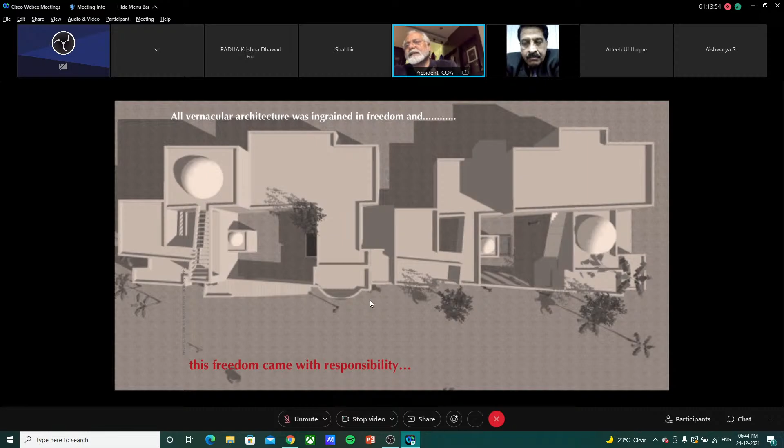When we talk of vernacular architecture, we think of mud buildings, huts, thatch roofs, tiled roofs, and so on, but not necessarily. Vernacular architecture has a larger canvas to look into and get inspired from. Traditionally, creativity was always linked with common sense, and all vernacular architecture relied on logic and purpose. We have lost logic and purpose in architecture today.

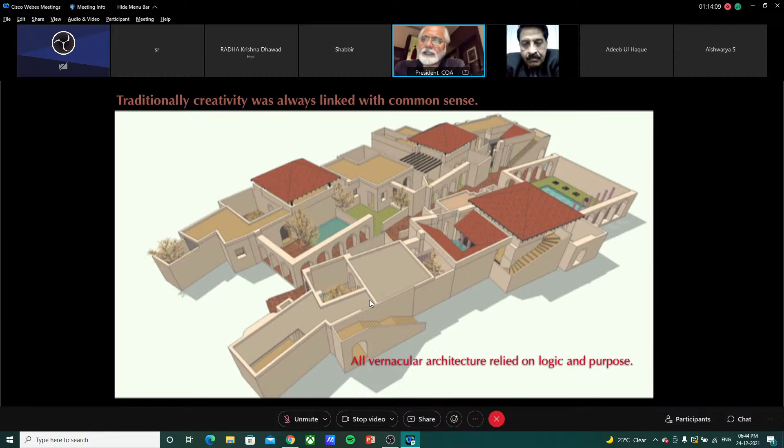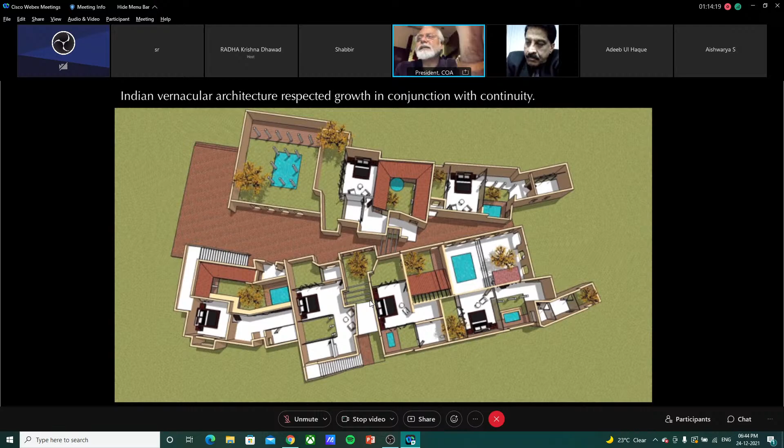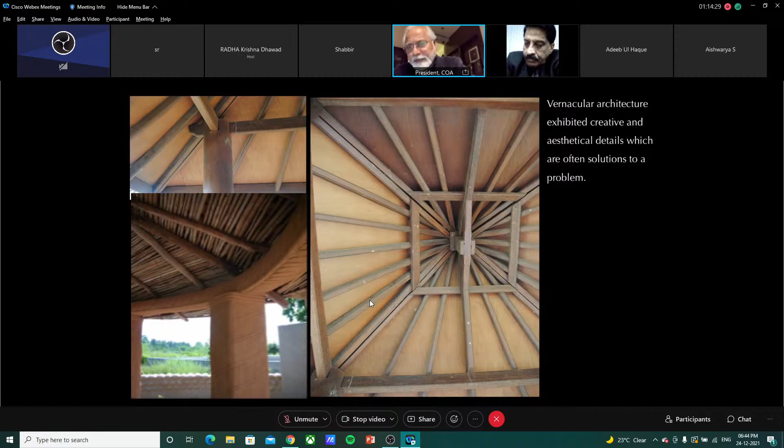Indian vernacular architecture respected growth in conjunction with continuity. That was very important—the chain of evolution I was talking of, growth in conjunction with continuity. Vernacular architecture exhibited creative and aesthetic details which are often solutions to a problem. Today we are creating problems and then giving solutions. It's the other way around these days in architecture.

Our architecture at Smita and Habeeb Khan Architects is a response to this, and a realization of the importance and appropriateness of the traditions of architecture that have gone by. Architects need to pick up the threads that modernity severed—the need to reinvent a new and more responsive architecture, which will be a continuum of the vernacular and a response to climate, context, tradition, and culture.

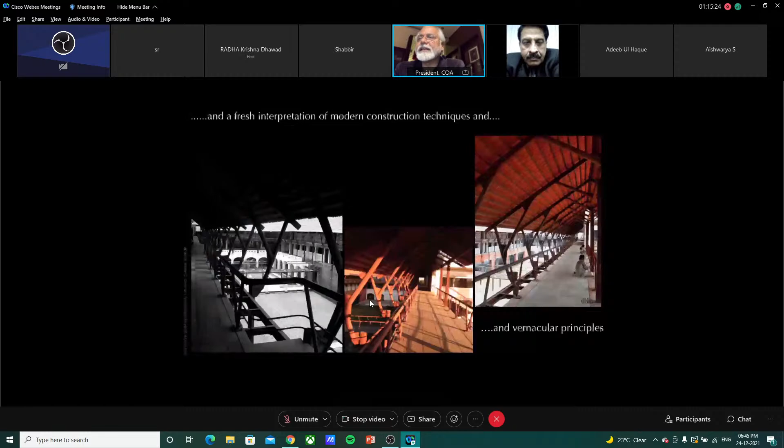We are reinventing the wheel time and again—our lost construction techniques, the importance of daylight, the ramifications of heat, and the appropriateness of built forms—resulting in a new architectural vocabulary, a language having its roots in layers of traditional wisdom, and a fresh interpretation of modern construction techniques and vernacular principles and forms, forming a link between the past and the present.

And this we call contemporary vernacular, wherein we learn heavily from the principles and wisdom of vernacular architecture and try to incorporate it into contemporary architecture.

I do not want my building, when excavated 2000 years down the line, to be mistaken for one built in 1011 or 1016. I want my building to look contemporary while it stands on a solid ground of vernacular wisdom. That is what is meant by contemporary vernacular.

This project is PIADS, Priyadarshini Institute of Architecture and Design Studies, my school of architecture. In central India, wooden posts are used for making huts and houses in villages. When the wooden post goes into the mud wall, it decays fast and gets eaten by termites. So they devised a technique where the walls stopped earlier and the wooden post went into the ground. The same thing happens with steel columns, so we used the same principle where the column stands independent of the wall.

Now, what in a nutshell is contemporary vernacular? It's like going back to roots, building sensibly, building optimally, building intelligently, and building correctly within the framework of context, climate, tradition, geology, geography, and economy. That, to me, is contemporary vernacular.

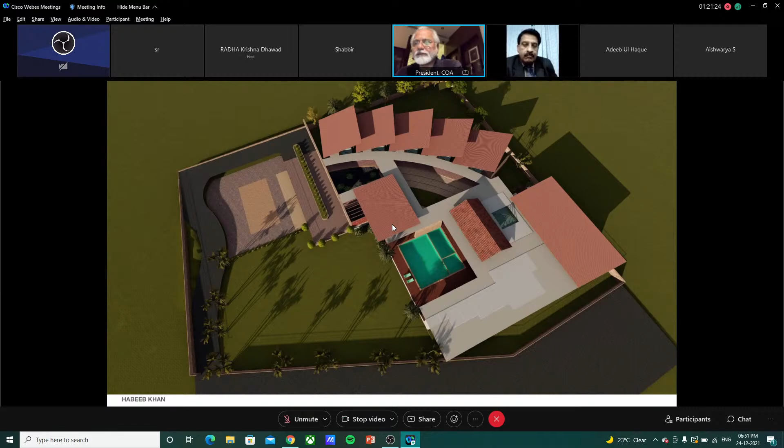This is a farmhouse which we're doing here in Nagpur, and it is a zero carbon footprint building. It sustains itself. It has solar roofs, local tiled roof, and local stone used. The entire water is being recycled within the complex, and the entire electricity is being produced within the complex itself. This is how it is.

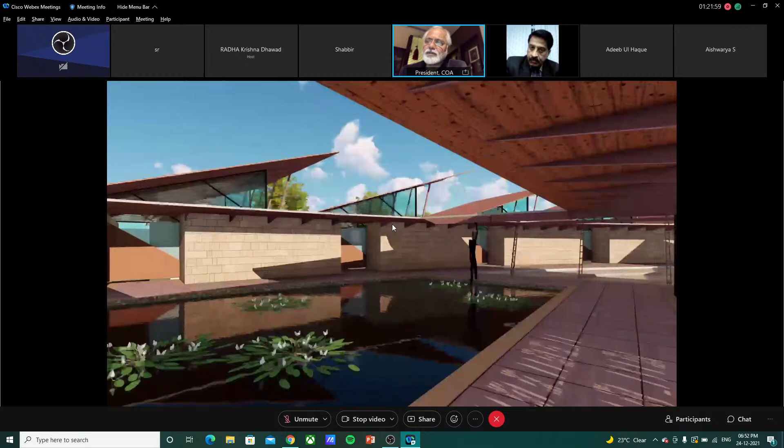I'm not explaining the project further. This is the entrance. You have a lot of water bodies to mitigate the dry heat in Nagpur, which reaches about 50 degrees in summers. We have large overhangs, large corridors. These are the rooms which are floating, very light material. The entire construction is in steel, and this is how it looks.

Swimming pool and the living room behind it, deck on the right hand side, various angles. Everything is steel and glass, heavily shaded from direct sun. Load-bearing walls, there's no concrete here — it's all stone, which is load-bearing, and the roof which is there.

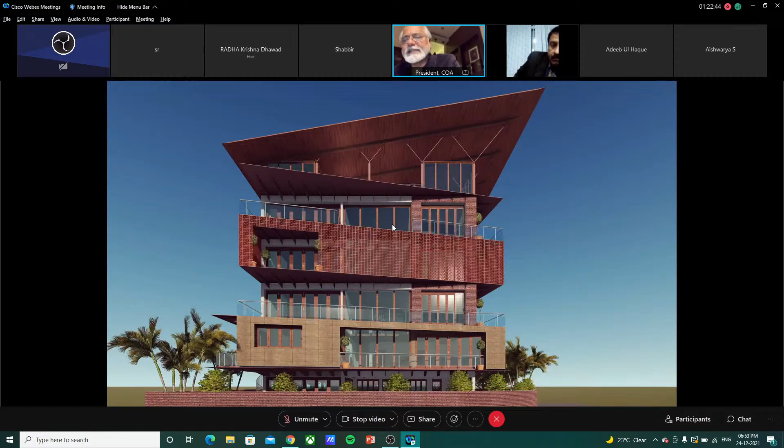There's another urban house which is built on a very tight plot. This also generates its own electricity and uses recycled water in the house. We generate so much electricity that we give back to the grid, so the electricity bill is zero. This is the facade on the north side, which brings in light, and so on.

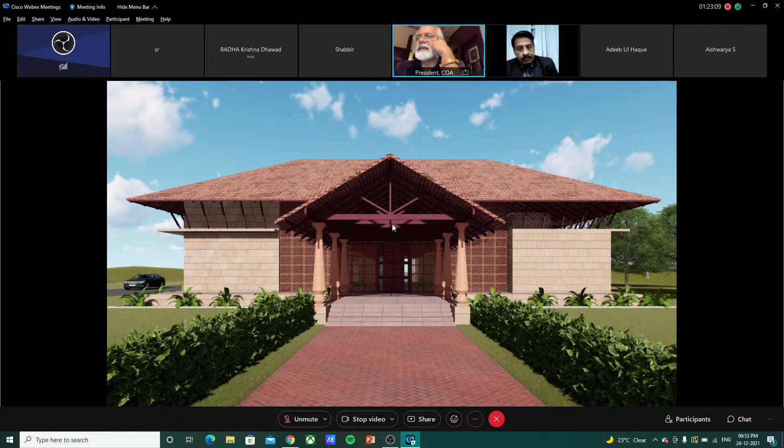I'll just go through this fast. This is a house we're doing, a farmhouse kind of thing for a well-off farmer near Ramtek. It is designed as a traditional house with a central courtyard, and the columns we're using are sourced from scrap dealers across the area. And this is that house.

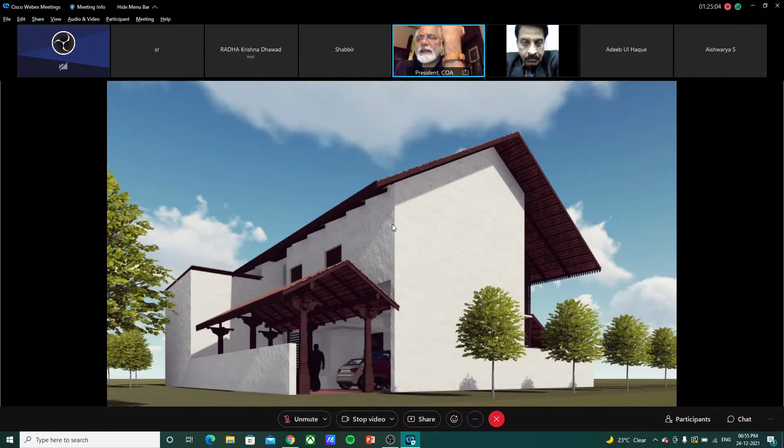This house in another locality close by also faces the lake, but is built in a different vocabulary, wherein rammed earth walls are used instead of stone. This is that house, and this is the facade facing the lake. Unfortunately this is on the western side, so you'll find longer overhangs to mitigate the direct sun from the west, and also jalis to cut the glare that happens in the evening.

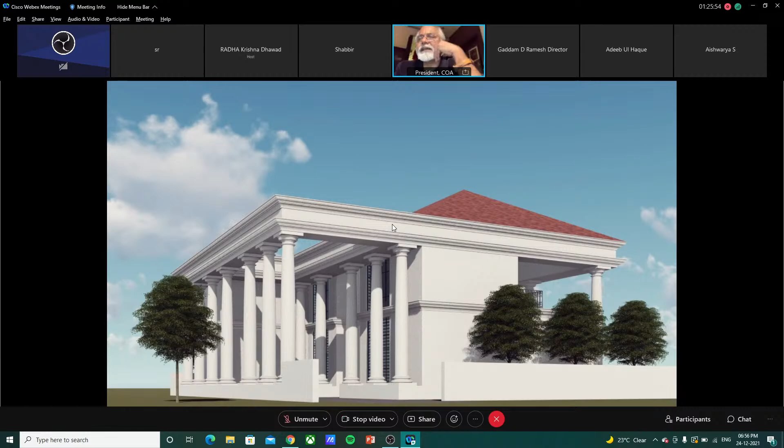This is another house we're doing where there was a strong British colonial architectural presence, with a lot of buildings built in the same vocabulary. So in this community residential development, we did not want to digress from the existing architectural vocabulary and create iconic structures in contrast with it. This house is totally different from what we usually do, but it's again a load-bearing hall with no RCC columns and slabs, yet it reciprocates and gels well with the existing prominent buildings on the campus.

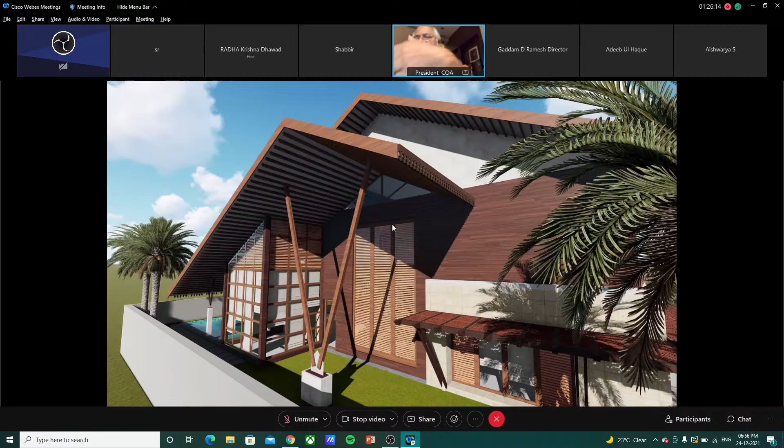This is a house in Indore that we have done recently. All these projects are almost in their completion stages, but I'm showing you rendered views because students will be able to relate much better to rendered views rather than fully completed images.

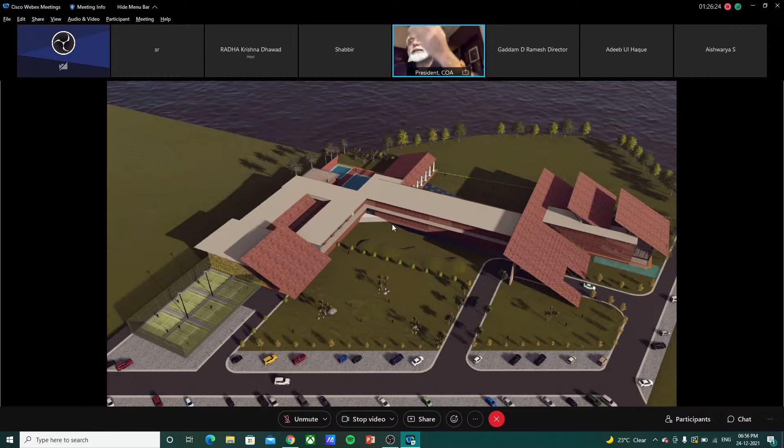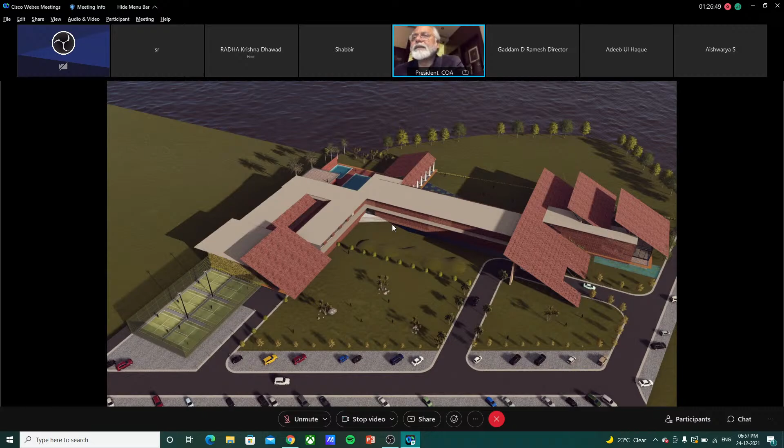The idea was that as soon as you enter the club premises, the design is such that it is absolutely transparent. So from anywhere in the plot, whether in the parking lot, the entrance, or anywhere in the club, you are able to see the view of the lake from there. This is the transparency that I'm talking of.

We have jalis, we have screens, we have glass behind it, and we have absolute transparency. The planning has been done such that you have walking corridors parallel to the lake, and the buildings perpendicular to the lake, so we are trying to maximize the eyesight and views to the lake.

That's the entrance lobby, and this is the entrance foyer. You come in, get dropped, and then you park, or you get valets to park, and this is how you enter.

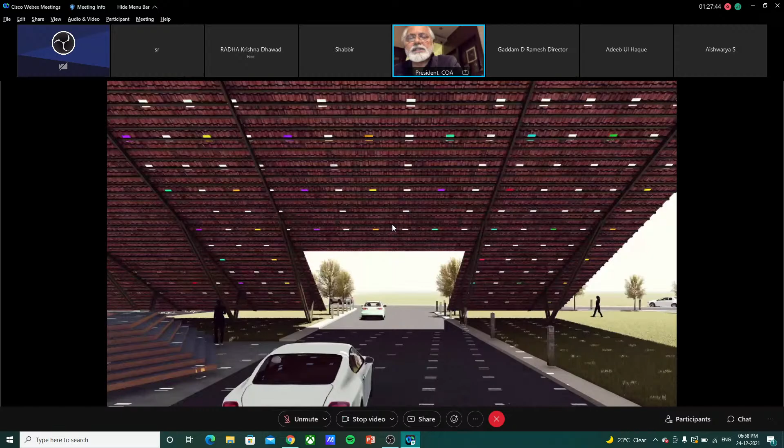This is the porch, where these days you rely heavily on the wonders of electrical and electronics engineering. As you start driving and enter the club, the landscape becomes very kinetic and dynamic. As soon as you enter, as the car passes through various sensors on the roads, the lighting and mood changes in the driveway and the porch.

So if there's one car, and then another car comes in, the lighting will change automatically, giving a surreal kind of experience. It's a long, winding drive into the club, so it's not a boring drive when you're driving in.

The lighting and landscape elements are not stable or static, but kinetic. The lighting levels keep changing, and when you get down from the car, the floor is also dynamic, so as soon as you step out, the entire lighting mood changes, and so on. This is how the walkway is inside the club.

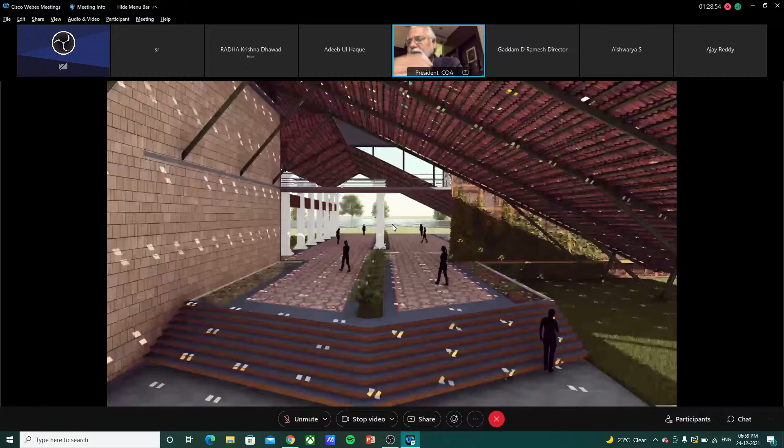Incidentally, this is also close to the same colonial development I was talking of. One of the buildings which was demolished had these Doric columns, which we have borrowed from there and used as structural elements in our club.

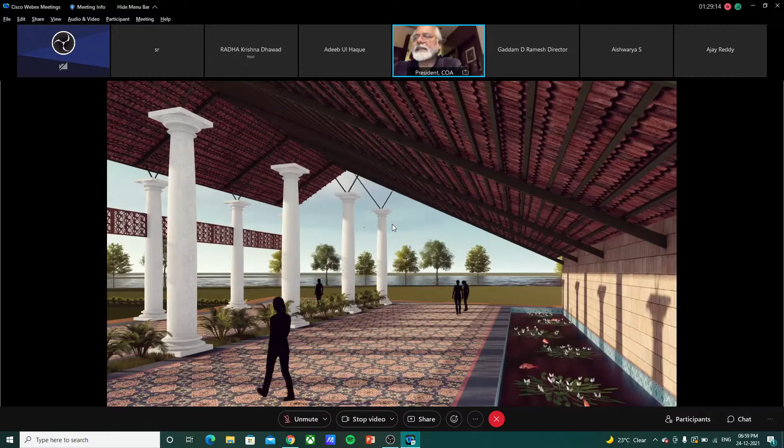This is how the club is, and these are the columns I'm talking of. There's a reception area, and this is the colonnade where you walk in, and from any point you will see the lake, whether sitting outside or inside, in the coffee shop, the lounge, the billiards room, the restaurant, or cafes. There's a central court around which the club is planned, and this is the swimming pool area.

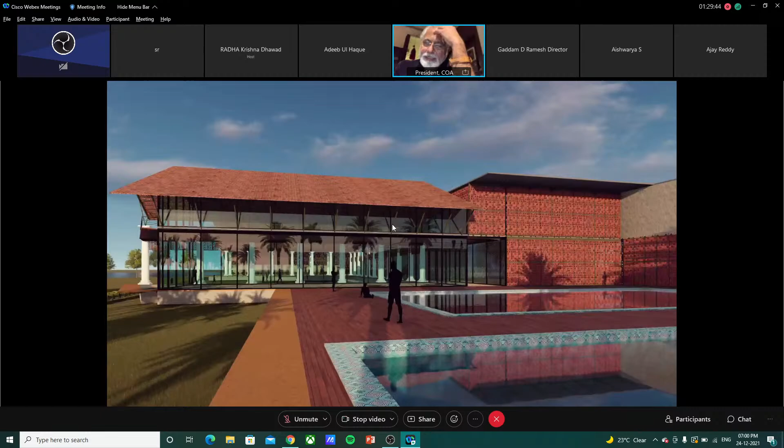Now this club and the entire development is on 40 acres of land, of which the club itself is about 6 acres. The entire 40-acre development is self-sustainable in all its means — electricity, water, recycling, sewage treatment plants, everything.

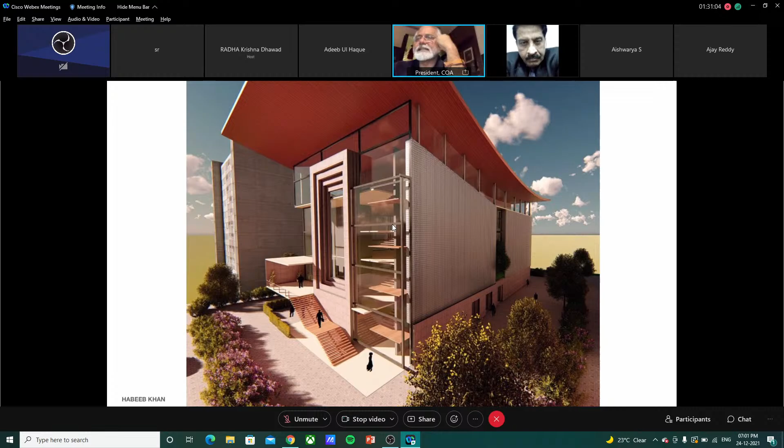Now, there's another political party's headquarters in Rajkot. It has a huge overhang because of the heat that exists there in semi-desert zones.

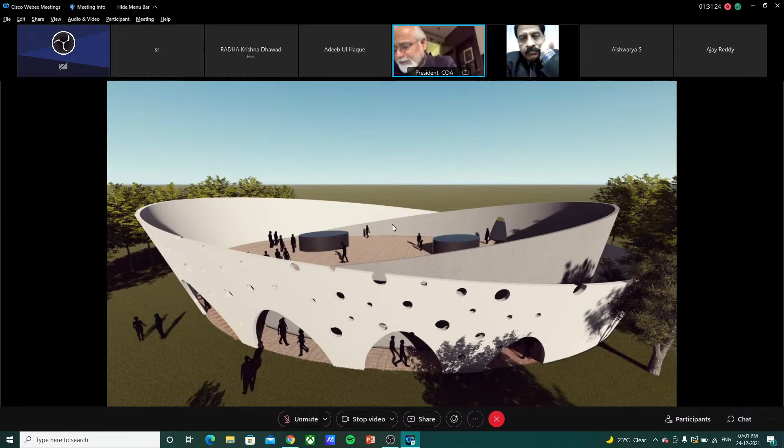And there's a museum that we're doing for two saints in Nanded. This community has a particular Nagada, a drum kind of thing, as their symbolic representation, the most visible representation of that community. So what we have done is derive the building form from that drum, the beating of the drums and things like that. And this is how it is made, and this is how it looks, corridors.

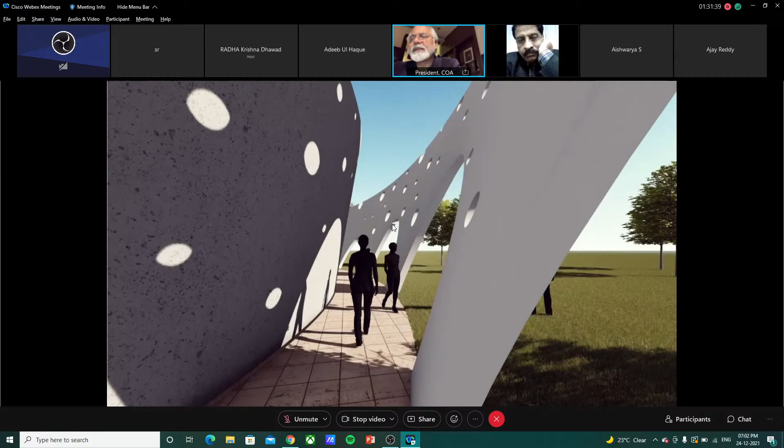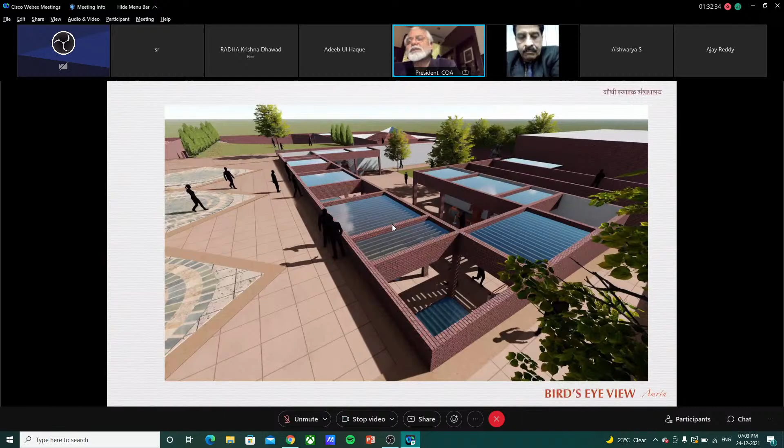So you see various courtyards, various covered and semi-covered courtyards, and the pyramids that you see are the museum halls and display halls. If you walk on the upper level you see only a parapet wall, and the building goes below it. You have various ramps to take you down into the display areas.

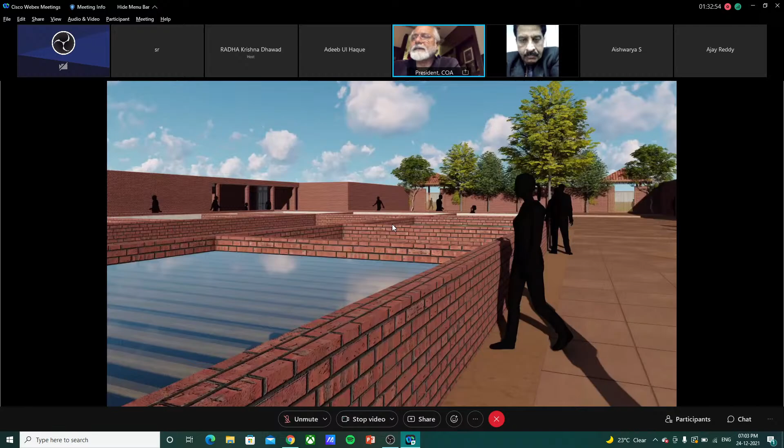This is built in total brick, exposed brickwork, and somewhere it's plastered to give some relief. You walk in through a ramp or through a staircase into the display areas below, and the statue of Gandhiji sits there. These are the museum display halls, various interactive displays—it's a dynamic museum. These are at the lower level, and you arrive at the terrace of the building, and at the lower level you interact through various courtyards.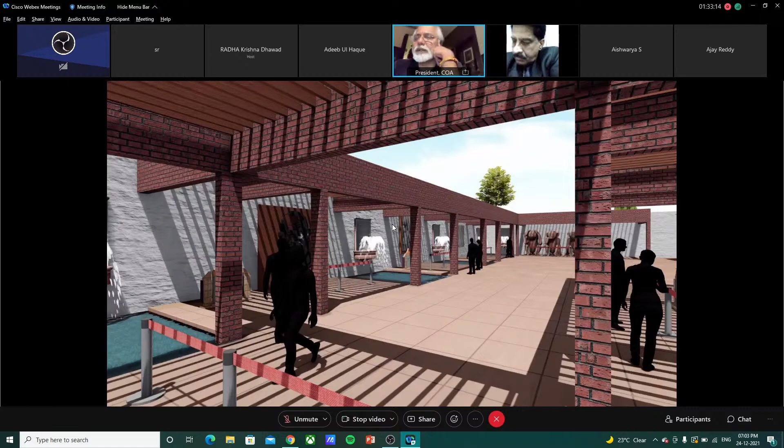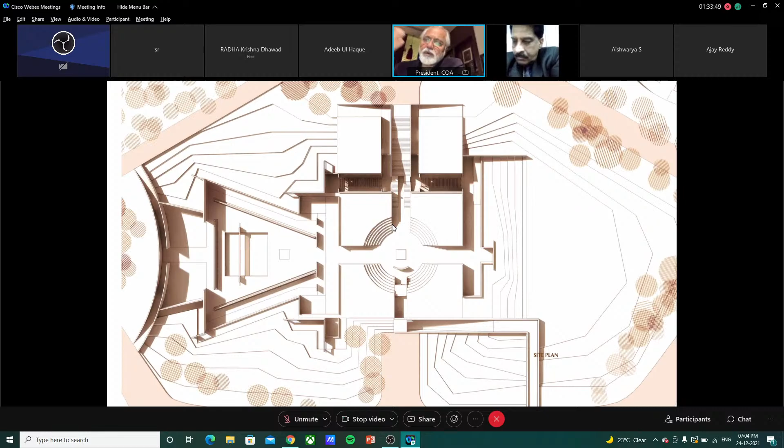This is a freedom fighter memorial that we're doing in Chhattisgarh, where tribals participated in the freedom movement and were unrecognized and unacknowledged. So they're making a museum and a smarak for it. This also goes underground because we're making it in a tribal forest area, the hub of a densely forested tribal region, so we didn't want it to spoil the natural scenery there. We have gone underground with only a little parabolic dome covering it.

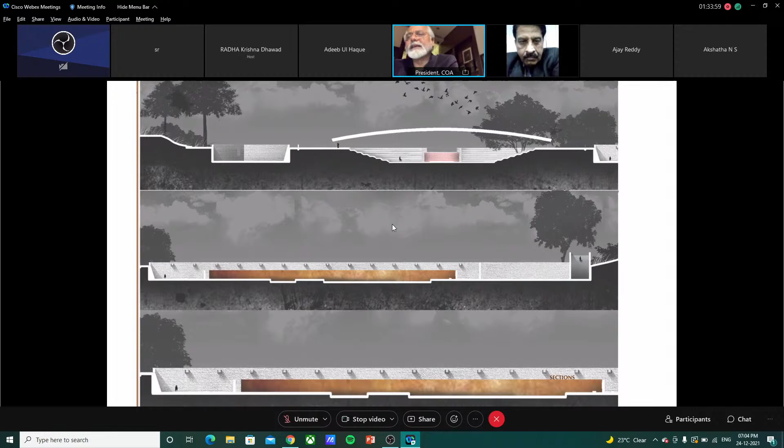Now, pottery near Chandrapur, Bhadravati in Maharashtra was a very important activity happening there. It's a brick kiln where Mangalore tiles, the terracotta tiles, were made, along with a lot of glazed pottery, but the industry had died down. So the Khadi Gramodyog, Khadi and Village Industries Commission, commissioned this project to revive the terracotta and glazed pottery industry, where there were two strong brick kilns. The chimneys of the brick kilns existed there, and we have tried to incorporate that into our campus design. It consists of laboratories, baking fields, drying fields, a conference venue, and residential quarters for national and international students.

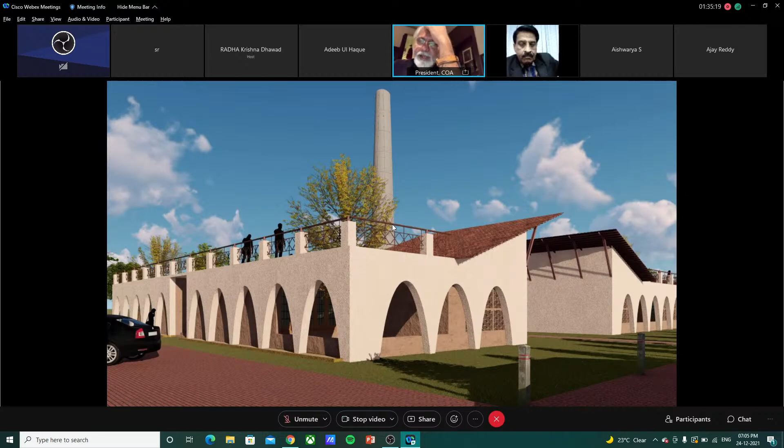This is how it is—made absolutely in adobe construction with rammed earth walls and parabolic arches, because you don't really need the horizontal lintel which would go in steel or concrete. The parabolic arch is the best example of a self-sustaining wall in rammed earth construction. There's a chimney in between that becomes an important visual element in the central courtyard around which the buildings are grouped.

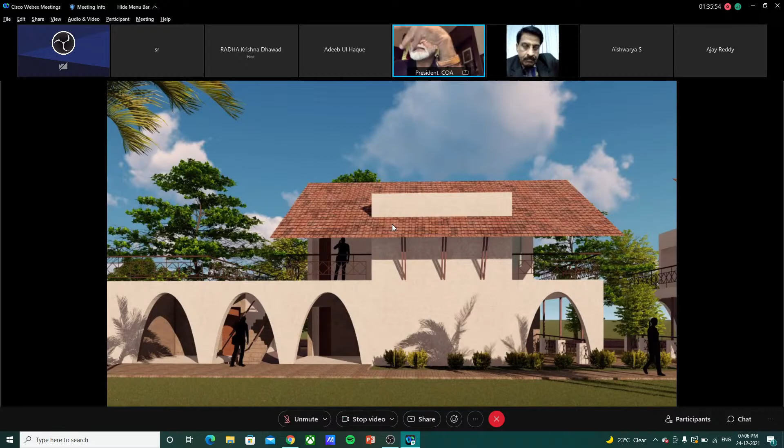These are the staff quarters, connecting corridors, students' hostels, various staff quarters of various levels, where international students stay. This is the conference venue, and so on.

Let me know if you have time, I'll continue, or I can conclude if you would want. Yes sir, definitely we can continue, not a problem.

So we are working on these wayside amenities, the highway stops that you have for the National Highway Authority. Where there's shortage of land, we have tried to optimize by giving the food court and dining restaurants across the highway, so that you save space and don't need to acquire more expensive land around the highways. The first pilot project is coming about 20 kilometers from Nagpur, where this tube that you see is a structural tube with solar panels around it.

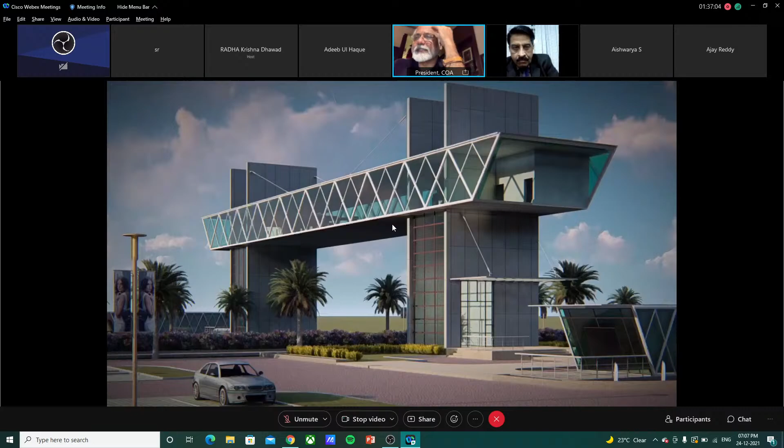This project generates electricity, even while cars pass on the road, through dynamic kinetic panels that exist in the road. We're able to supply solar electricity generated from this project to a couple of villages. You have lifts and staircases taking you up as soon as you enter, and then you walk across, and the view you get from the 6-meter height on the highway is absolutely dynamic, because the cars and traffic keep moving below you.

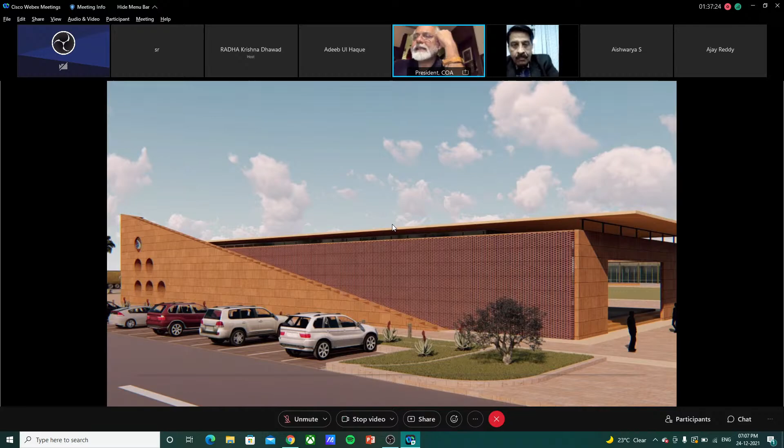And this is how it is. This is another example of wayside amenities in Jaipur, on the highway which passes from, I think, the Bharatmala project, heavily inspired from the Jantar Mantar and the architecture of Jaipur.

This is how it is. When you come park, you don't see anything. You see a brightly lit jali screen, which is a very strong characteristic of Rajasthan architecture, and then you have a floating roof on top. This is a water channel, a recycling rainwater harvesting pond, which recycles water.

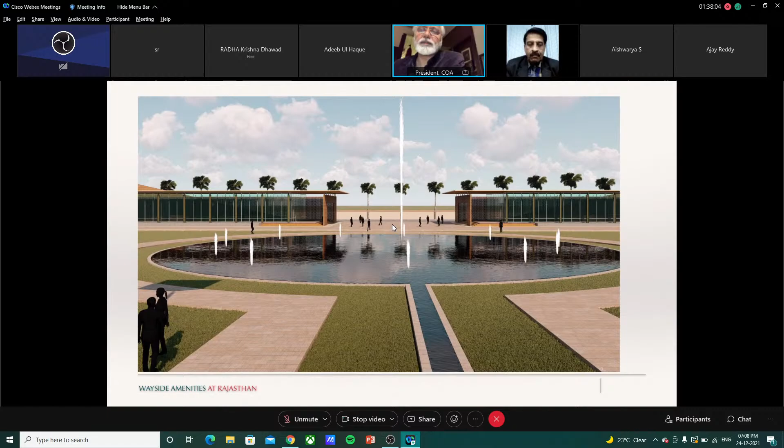This is also a net zero Griha compliant project, wherein there is no outside intervention as far as electricity, water, everything is concerned. The entire water is recycled through an STP. There's an RO plant, a solar plant, windmills, and everything in the project. And this is how it is.

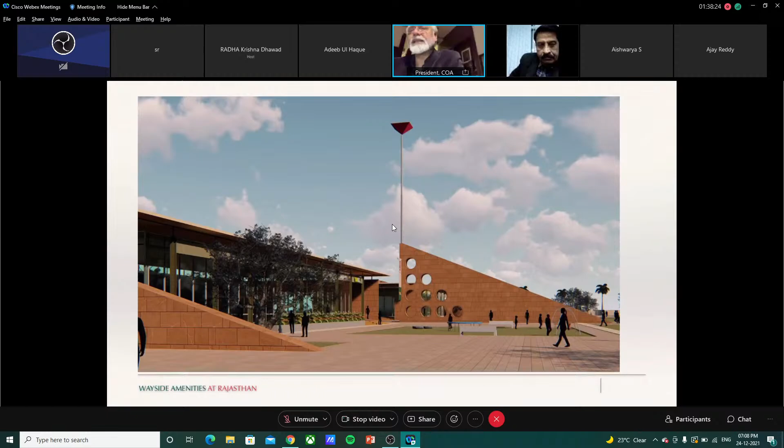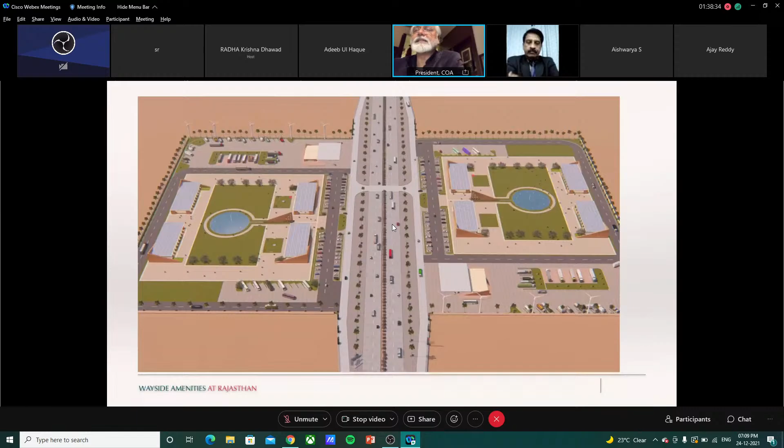This is how it looks from the entrance, and these are some details that you see. Overall this is an LHS and RHS, the left-hand side and right-hand side development. When you're coming from, let's say, Amritsar, you wait on the right-hand side. If you're coming from Jamnagar, you wait on the left-hand side. The development goes around with windmills and everything.

It consists of a food court, a trauma center, local handicraft shops, a dhaba, fuel stations, and so on, and a motel. This is somewhere near Jodhpur. When you come from Jodhpur to Gujarat, down south, the vocabulary changes, and this is inspired by the forts of Jodhpur.

This is how it is behind the food court. The jali is inside, and the same recycling pond gets converted into a square pond, just like the step wells, and so on.

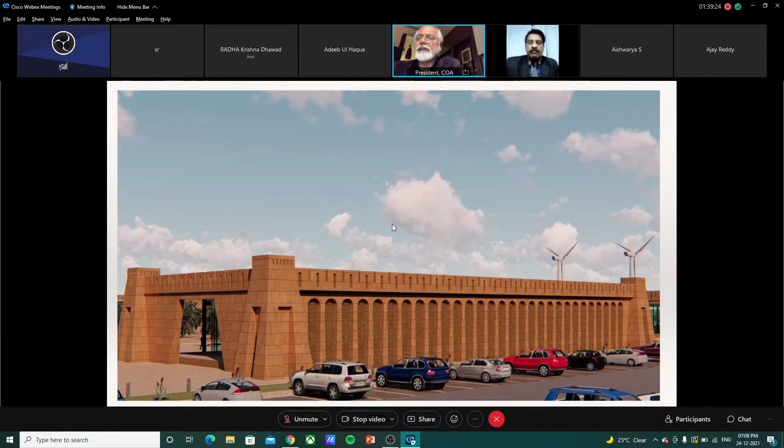Now this is a temple project that we're doing, one of the Jyotirlingas in Parali. The project has not started; it got shelved at the moment because of some political issues. It's a redevelopment of the Jyotirling temple with various local stone, the black basalt stone, the Harihar Kund, where Hanuman used to come and, as per the fable, take a bath and go to the temple, the Ram and Sita temple.

This has become a trash bin kind of thing, where the entire area's trash is being thrown into that pond. So we propose rejuvenating that pond back to its glory. This is the entire complex, but I will not go into detail - it's a huge project, so it's very difficult to explain in a short time.

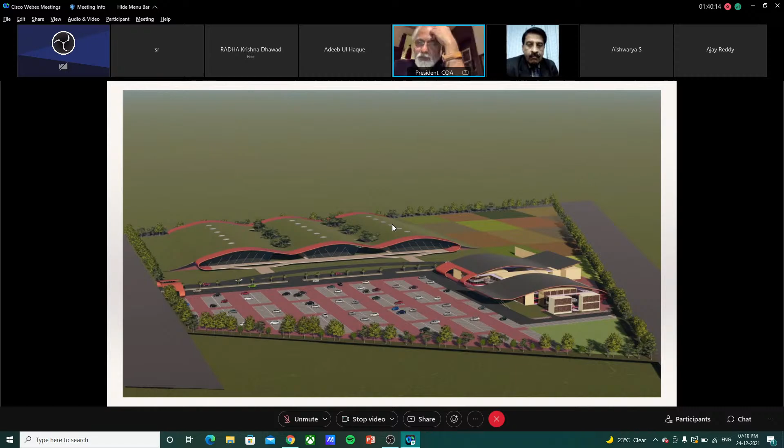We're doing a convention and exhibition center for an agricultural university, which also conducts the largest exhibition on agro products, agro produce, and technology in this part of the country, central India. They were short of land, so what we've done is address their need for horticulture fields and agricultural fields for experiments they propose to do in the laboratories being built.

This borrows heavily - the entire roof of the project is an experimental field of horticulture. There's a parking area, and the slight curves you see are because of structural stability, making the structure lighter since a parabolic curve is a self-supporting structure. So you need fewer columns and less material to support the roof.

It is punctured by various courtyards where you see trees coming in, where people can sit during exhibitions, interact, eat, and so on. And this is how it looks from the entrance.

And you can see the open space in between, punctured in between, where you can sit, interact, talk, and so on. This is the laboratories blocks and experimental administrative blocks and so on.

Now I'm showing you a few projects which are completing in the same vocabulary. Some office building lobby of a multi-storied office building.

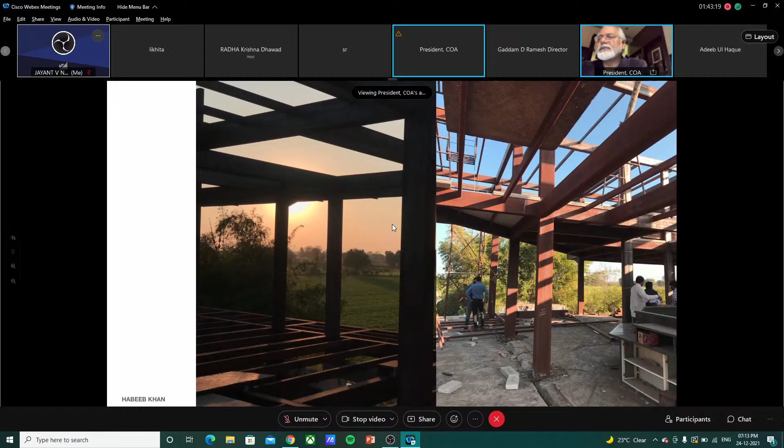These are some houses that we've built earlier in Nagpur, and some interiors of the houses that we've done earlier. These are houses that we're doing for a politician, built with EPC panels, engineered produced panels, and steel.

Some pubs and lounges that we've done, and this is a temple development project. We do a lot of temple development, integrated tourism development for temples in Maharashtra, and this is one such temple, with dining halls, living spaces, shopping areas, dormitories, and some office interiors.

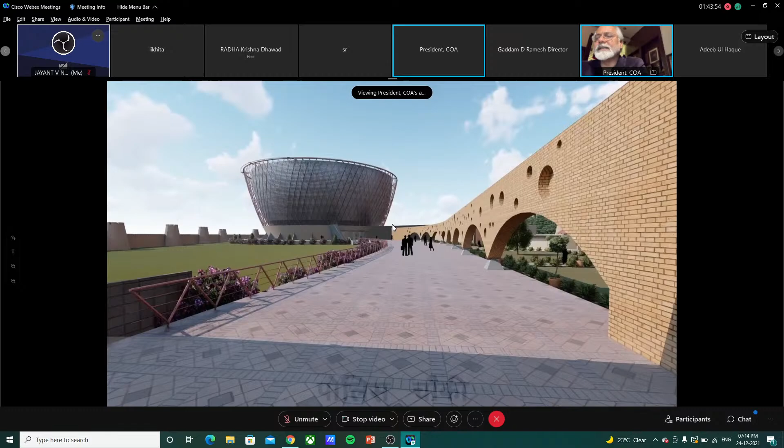This is a very interesting project we're doing for the Banjara community in an area close to Washim, about 250 kilometers from Nagpur. It's the largest inverted dome that we are making, made in steel, with a museum inside dedicated to Banjara culture and history. This is the ceremonial walkway that leads to the museum.

The museum is clad with solar panels all across on all sides of its facade, generating electricity for the entire surrounding areas. This building is at its construction stage at the moment, and it's a very dynamic museum, not a static display.

It's a dynamic display telling the story of the entire Banjara community - when a boy is born into the Banjara community, what he goes through as he becomes a teenager, an adult, gets married, celebrates functions, and so on until he dies. The story unfolds from the top of the museum, the fifth floor.

You go up to the fifth floor and come down through ramps. As you come down, you explore the life of a Banjara through various methods - static displays, set displays, interactive displays, kinetic displays, and LED screens. It's very, very interactive.